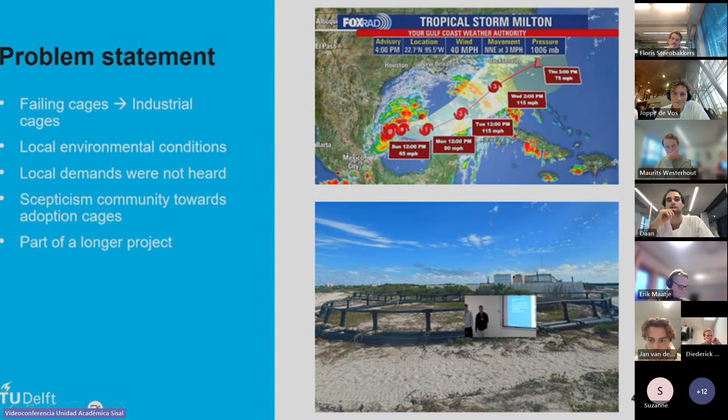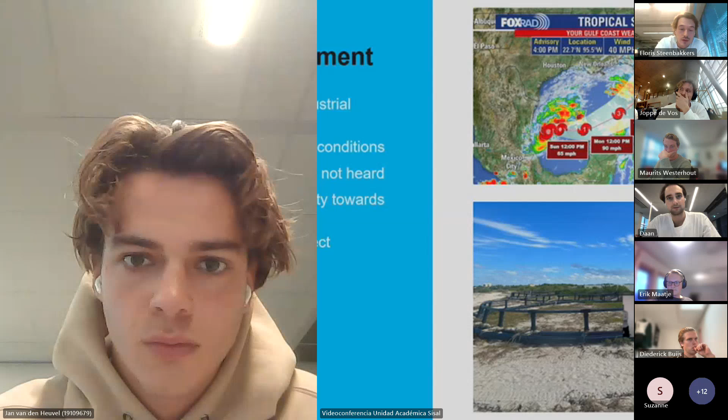So we have the problem, and now it's like, okay, how are you going to tackle this problem? I would like to refer to a quote from my dear friend Steve Jobs, who said Picasso had a saying: 'Good artists copy, great artists steal.'

What I'm trying to say is that we came here thinking we need cages, but we didn't know anything about cages. Were there not examples of cages in the area? So we ended up in Celestun, a fishing port nearby.

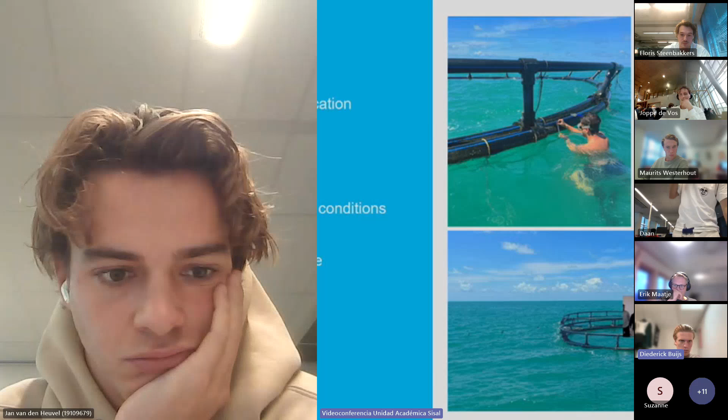We chose this location because it has a similar geographical location on the same continental shelf. It has already proven to be economically viable for a small fishing community.

However, the environmental conditions are different—the depths, currents, and waves differ, which will be elaborated on further. Their cage is found to be too far offshore for the fishermen, which increases fuel costs and so on, but because of the fishing refuge area, they could not put it any closer to shore.

Also, it has shown occasional failures. The Celestun setup is 3 cages, but in the bottom right, when we visited, it's only 2 cages—one of the cages failed and broke due to the environmental conditions.

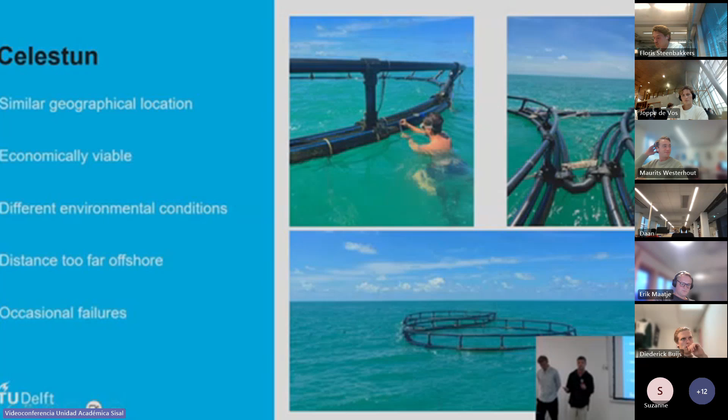So what we did is we took the Celestun cages as a basis, and we did some measurements and took photos of how the construction was actually built. That formed our basis for this project.

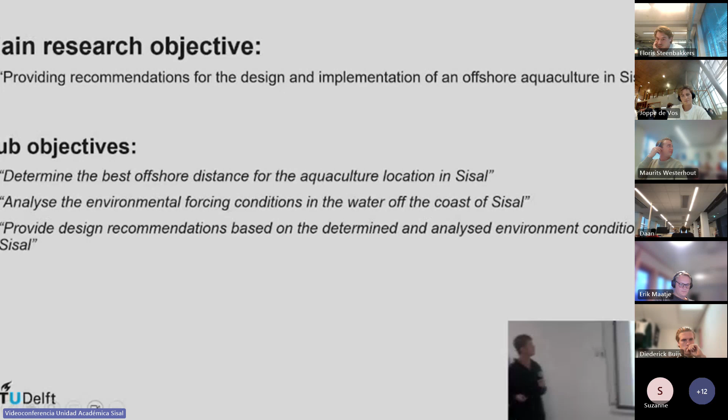Then we defined our main research question based on this. Our main research objective is providing recommendations for the design and implementation of an offshore aquaculture in Sisal, and these recommendations are for long-term success.

We divided them into 3 sub-objectives: determine the best offshore distance for the aquaculture location in Sisal; analyze the environmental forcing conditions in the waters off the coast of Sisal; and provide design recommendations based on the determined and analyzed environmental conditions of Sisal.

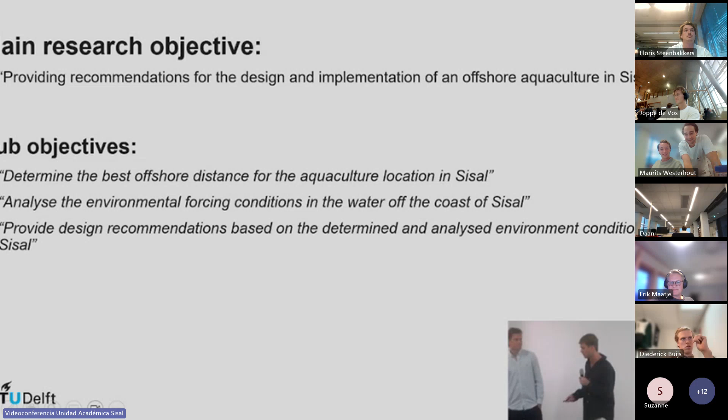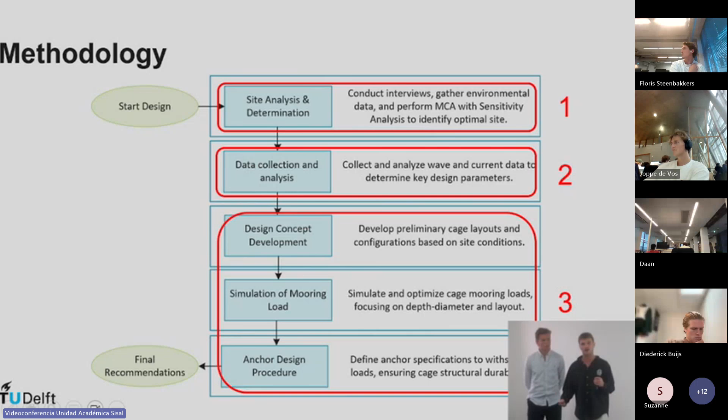Our methodology, as I said, divided our project into 3 parts. The first part consists of a site analysis and determination—Jetse will talk about that. Then we've done data collection and analysis—Chris will talk to you about that. And then part 3, Tom and Martijn will talk about the design concept and procedure, some simulations, and eventually an anchor design procedure. This all provides recommendations for the aquaculture design to ensure long-term success. I'll give the word to Jetse now.

Thank you, Sebas, for that wonderful introduction. As Sebas explained, we first had to determine where we want to place the cages. So how we did that was we chose certain distances offshore from Sisal, ranging from 2 to 20 kilometers offshore.

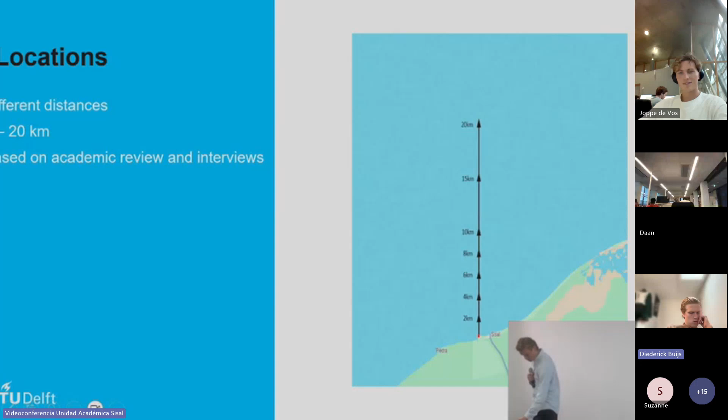This range was based on academic reviews and talks with experts. To see what influences those locations and what factors are important, we conducted some interviews. These interviews helped us gauge interest, set context, and see the perceptions of the parties involved, so we interviewed fishermen, as you can see here.

We interviewed a fisherman from Celestun. Also, at the beginning of our project, we visited a meeting between the fishermen in Celestun and the fishermen in Sisal, about exchanging knowledge of the fishing cages in Celestun. Also, I think you all know him—we interviewed and talked a lot to our dear friend Carlos over there.

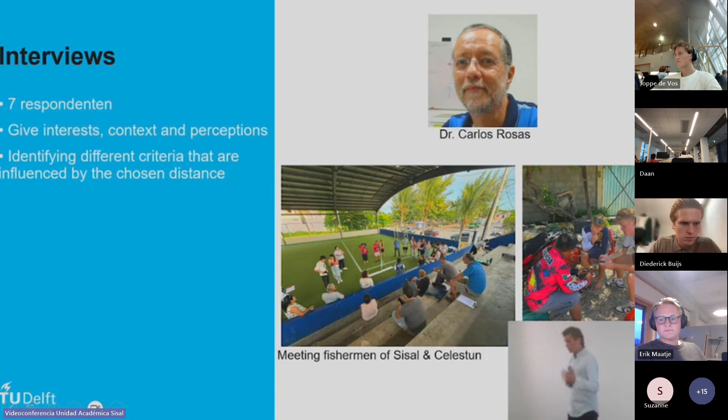And again, the main reason was to identify the different criteria that are influenced by those distances. And what came out of these interviews was that the criteria, actually, you can divide them in three main subjects, which are the local criteria, the environmental criteria, and the structural criteria. And our job was to find a meeting point. We call it the solution space of all those criteria.

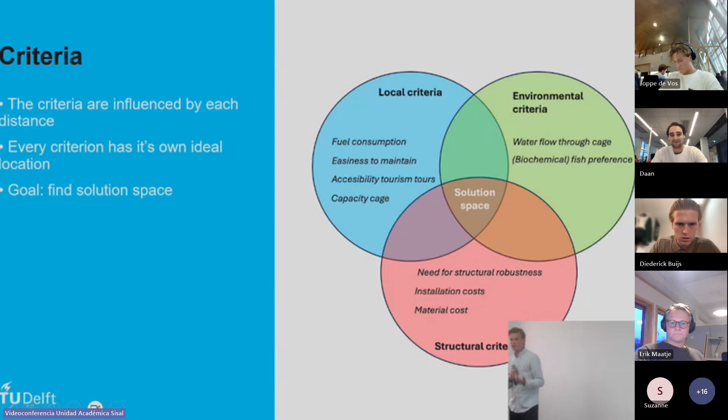So we want to see an optimum of all those criteria, because every criterion has a different favor to a distance. For example, fuel consumption wants to be at a distance closer to shore, because then there's less fuel costs. And what we did was we gave every criterion a score from 1 to 5. 5 means that it performs really well on that distance, and 1 means that it performs really bad. So you can see here on the right-hand side, light blue represents fuel consumption, and at 2 kilometers it gets quite a good score, namely 5, which means that it is very good at that distance.

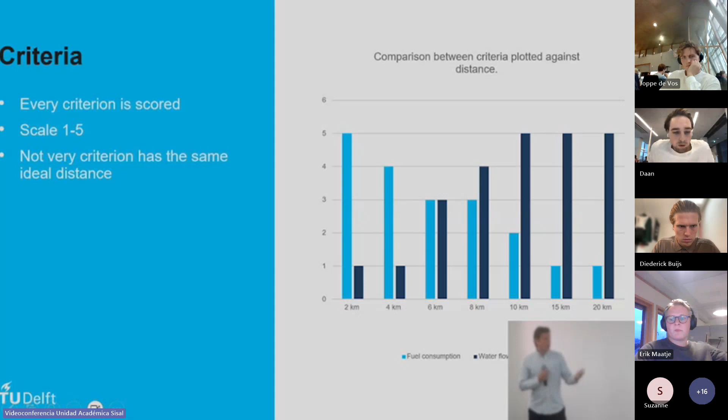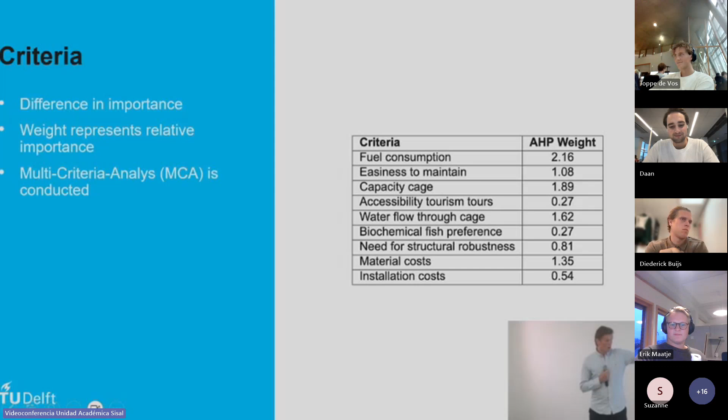At the same time, we show water flow through cage, and you can see that at 2 kilometer distance, this criterion performs really bad and scores therefore a 1. And as the distance increases, the score also increases. So what conclusion we have to draw from this figure is that not all criteria are considered good at the same distance. And another thing we drew from the interviews was that the parties involved, so the fishermen, but also the experts, didn't weight the criteria all the same. So, for example, fishermen really favor fuel consumption above accessibility of the tourism tours.

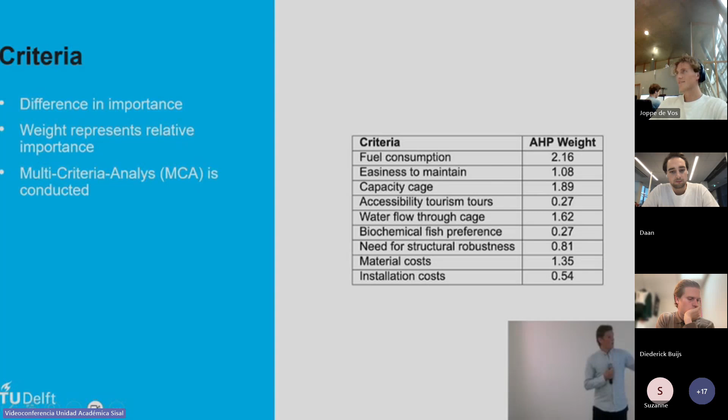So we give every criterion a weight, and this weight represents the importance of that criterion. So, for example, fuel consumption contributes 8 times more in the long-term success of the fishing cages in Sisal than accessibility of the tourism tours. With this information, so with the weights and with the different scores we gave to each criterion, we conducted a multi-criteria analysis, as you can see here. So the scores were added up for each distance, resulting in this figure. And as you can see, 8 kilometers gives the highest score, which is 37. So we can conclude that this distance is the most ideal for the long-term success of the fishing cages in Sisal.

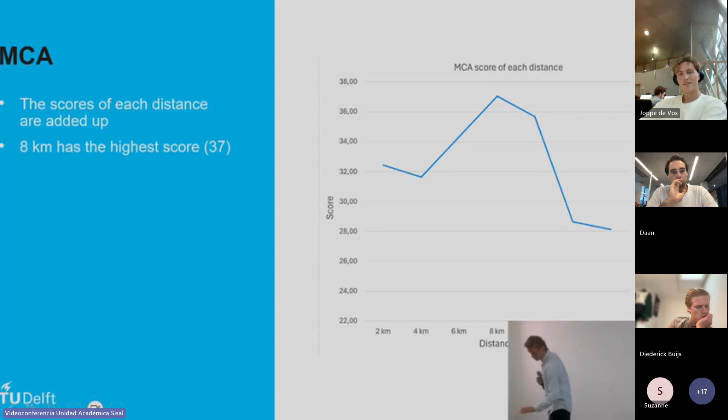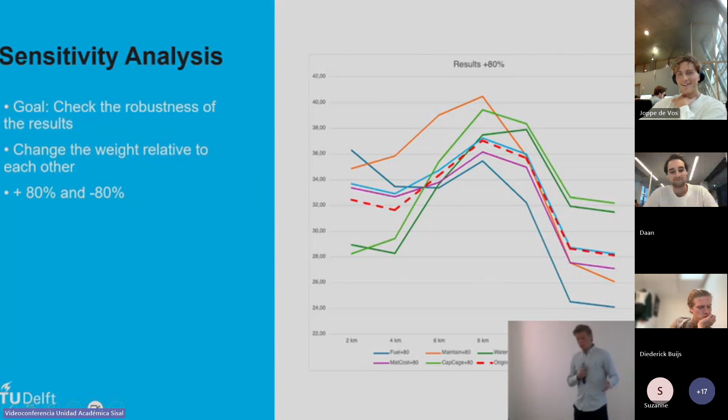However, there is one big problem with MCA analysis, and that is that a lot of assumptions are being made during the process, and there are also a lot of uncertainties. So a way to tackle this is to perform a sensitivity analysis. And with the sensitivity analysis, the goal is to check the robustness of the MCA results. So what you do is you change the weights, and in our case it was 80%. So one criterion becomes 80% more important than the others. And we did it also with -80%, and these are the results. On the left-hand side, you can see results with 80% more importance. The red dotted line is the baseline, so that's the line that came out of our analysis, the predicted analysis.

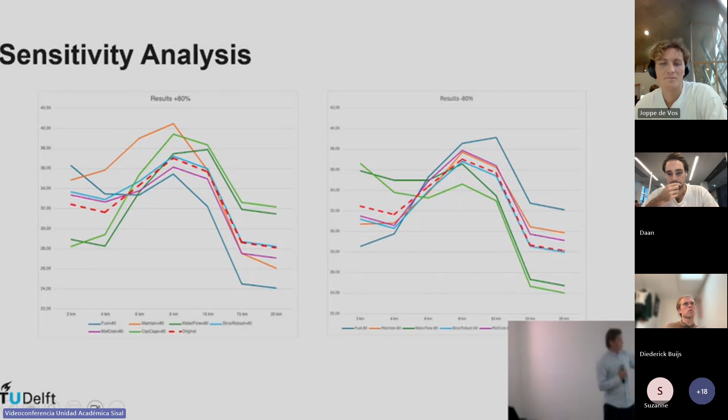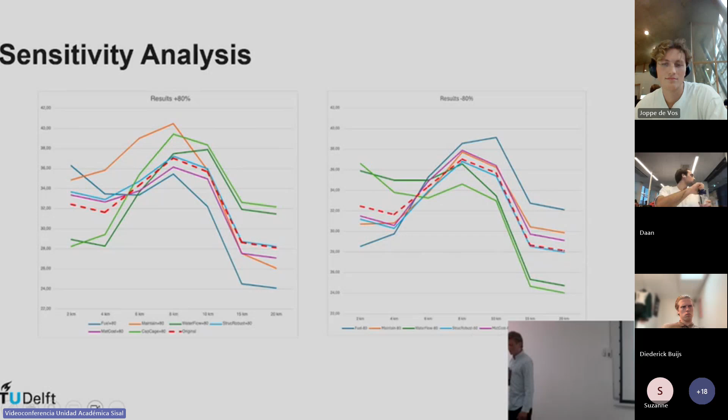And when we look at fuel consumption, which is the blue graph, if it's reduced by 80%, then the whole graph shifts to the right, which is again logical because when fuel consumption gets less importance, then the rest of the scores perform better and the distance is moved further away. Now, what we can learn from these two figures is that in most of the situations, except for fuel consumption and one other, 8 kilometers is always the peak of each graph in both graphs. So we can conclude that indeed 8 kilometers is a robust and good distance for the long-term success of the fishing cages. Okay, now we know the distance, so 8 kilometers.

I would like to give the word to Chris for talking about the environmental conditions. Thank you. Thank you, Jetse. So now we'll go on to the environmental conditions. So what this means is: what forces is our design subjected to? And to make our focus not so broad, we are only focusing on storms. So what are the storm conditions for our design?

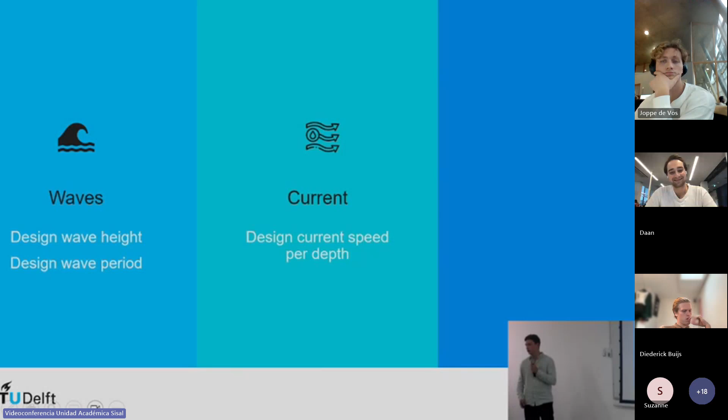So we know our location, and we know we want to focus on storms. So what we're gonna look into is what are the wave height and the wave period for these extreme conditions? What is the current over depth for these extreme conditions? But also very important, where do they both come from?

Before we get into the conditions, let's look at the data. So the data we used is firstly local data through ADCP, about 12 kilometers offshore. And we used the waves and the currents. What we also used, because it had a broader range, so I think 40 years, we used ERA5 reanalysis data for the waves, which is about 40 kilometers offshore for the location.

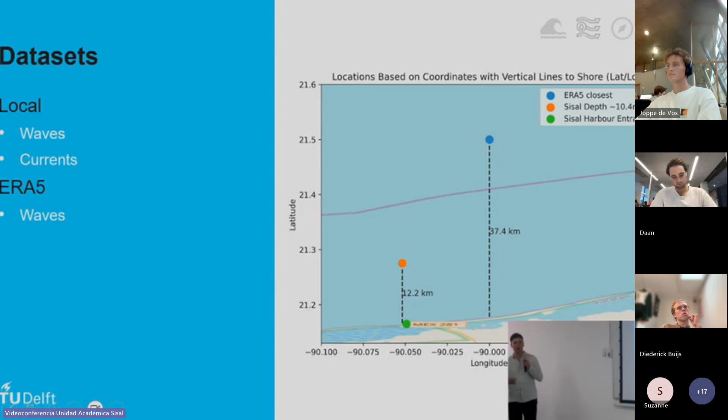Now looking at the waves, we used the ERA5 data because it had a broader range. So 40 years, and what we did is we set a threshold and looked at every storm that was independent above this threshold. So what storms had a wave height more than 2.7, and were these waves 4 days apart to make certain that they were independent. With this, we fitted them to a generalized Pareto distribution. This is used to fit the end of tails, so extreme values. And with this, we could calculate the return period.

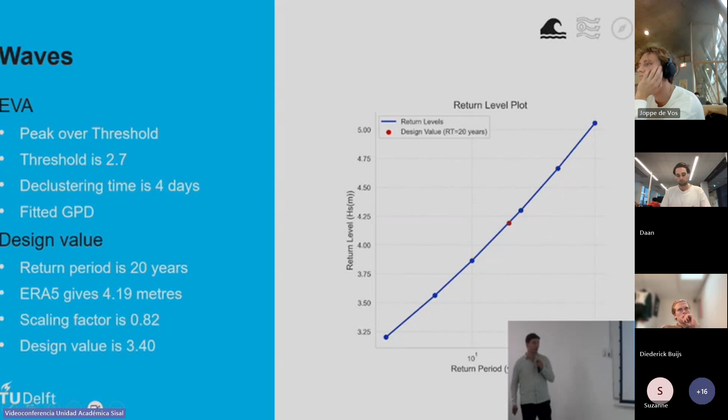We needed a return period because we had a design life of 20 years, and we wanted to know what wave height our cage is going to be subjected to in these 20 years. So using the return period of 20 years, we came to a wave height of 4.19 meters. But because we used the ERA5 data, it was 40 kilometers away and was not as close to the shore as our cage will be. So by using the local data and calculating a scaling factor, we could actually calculate it for closer to the shore and came to a design value of 3.4 meters.

With this 3.4 meters, we calculated the wave period. So we used the ERA5 data again, because it had a strong correlation between wave period and wave height. And with a power law regression, we could calculate for every wave height, and for our wave height of 3.4 meters, the wave period. And because we wanted to have these extreme forces on our design, on our cage, we wanted to look at the top level. So what is the confidence interval for 95%? What is the most significant wave period? And we came to 9.34 seconds.

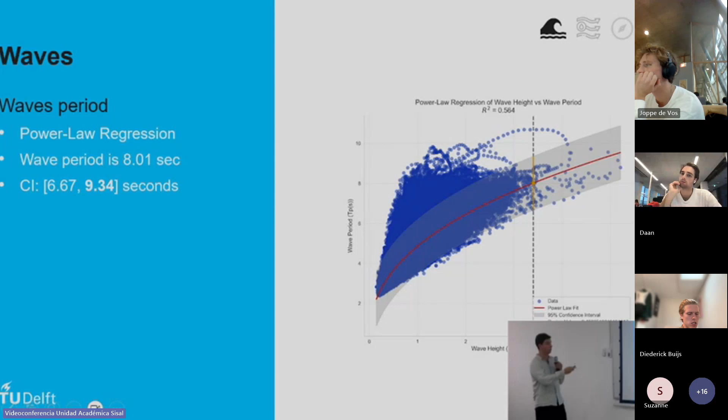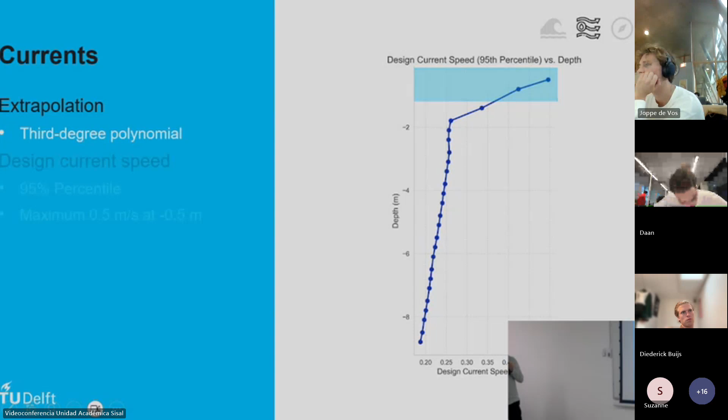Then we'll continue with currents. We had the current data from about 1 meter below the surface to about 8, but we wanted to have more data on top. So what current forces is our cage subjected to? So we extrapolated the data we had below to calculate the data on top with a third-degree polynomial. With all this data, we used the 95th percentile to calculate the design value.

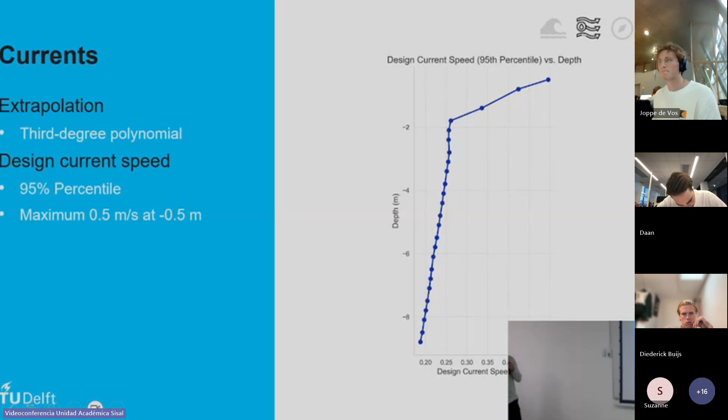This is because, unlike the waves where we had 40 years so we could do an extreme value analysis, we had 10 years. So extreme value analysis wasn't going to have the same results. So with the 95th percentile, you have a value that is higher than 95% of all the values, but leaving out the 5% that may be due to errors and uncertainty. So it's actually quite a safe value without being too conservative for the structure, because you'll get values that are way higher and are actually not going to be here. And what we figured is that the maximum was 0.5 meters per second at 0.5 meters below the surface.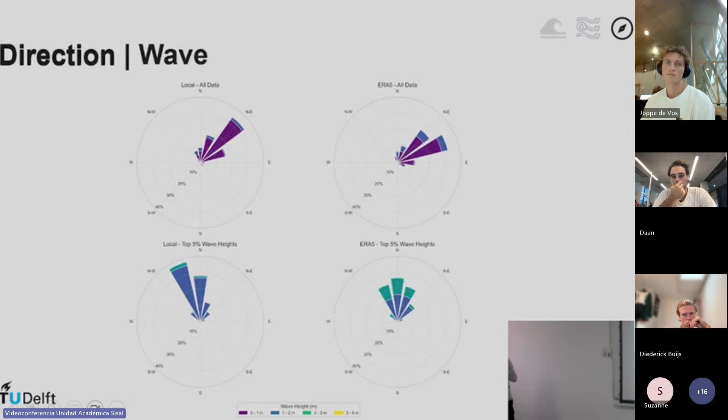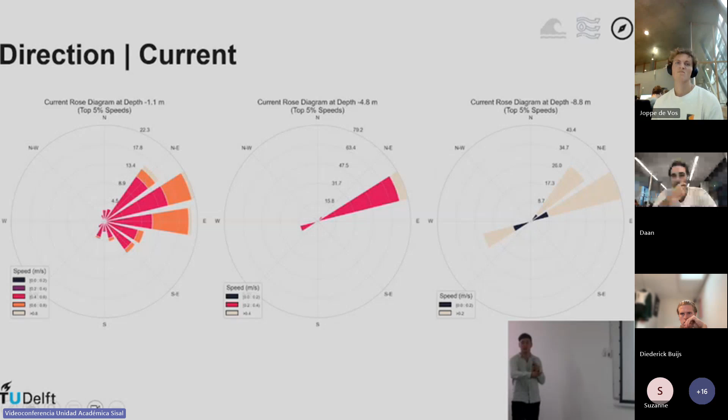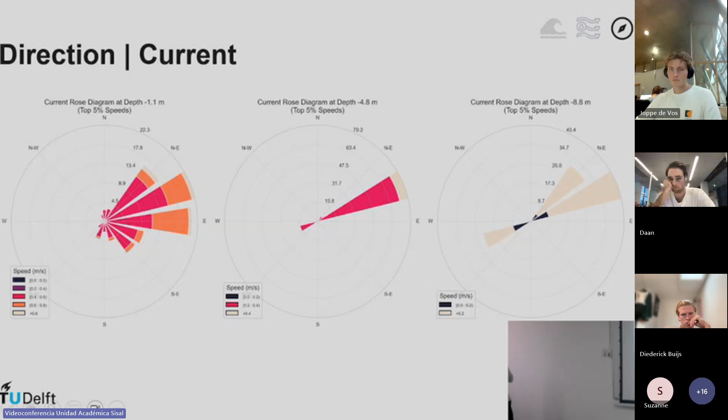There is a difference. And with the current, if you look at the top, there's a lot of variability. And this is because it's close to the surface, it is more prone to error, and you have winds. So there are a lot of reasons that this is unreliable. So what we used is more depth for the direction. And with this, and again by using the top 5%, we could look up: okay, if we take the top 5% of both the current and the waves, so all the times that they're all on top, so this means all our storms that we're looking into, what is the general direction?

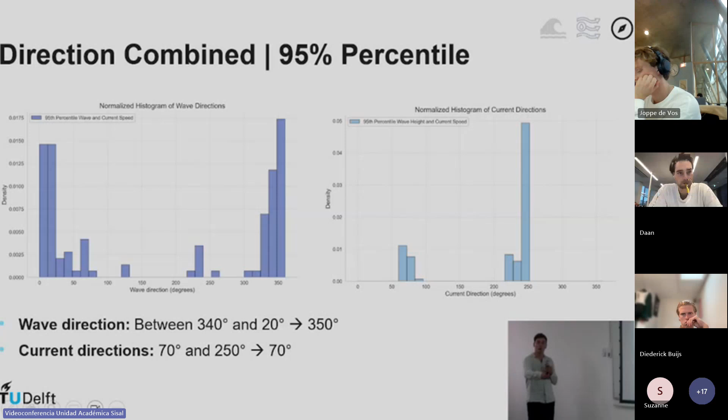And you see that for the waves, it's actually always from the same direction, just slightly, but with current there are two directions. You have the 250 degrees, and, but again, because of the minimal degrees between our two forces, it would actually have the highest force on our structure. So we decided to use the 70.

To conclude, for the wave,

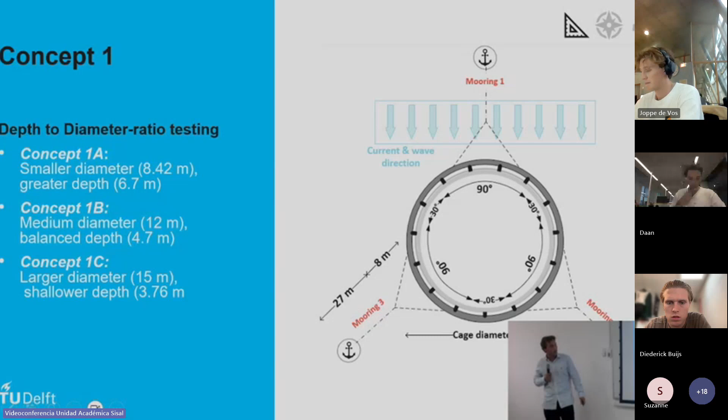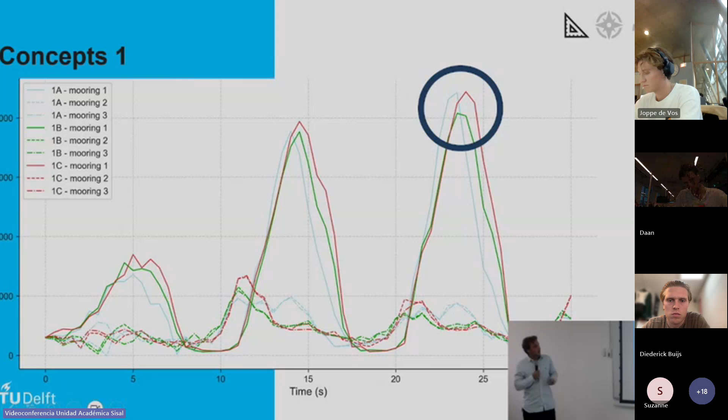Well, what are the results then? The results looked like this. So over here, you can see all the mooring line tensions, the 9 mooring lines, because there are 3 sub-concepts, of course. And over here, after going to a more steady state, we found out that the 1B, the actual diameter depth ratio of Celestine, actually reduces the drag and has the least mooring line tensions in it. So yeah, that's interesting. So now we know what diameter depth ratio we're going to look at.

And we made another concept, the concept 2. This is a more simplified structure that reduces material costs and installation complexity because it has 4 mooring lines, anchor systems. And this distributes the forces into, well, looking at 3 mooring lines, of course. So this is the second concept we found. And there's a connection piece between them, just like the ones in Celestine.

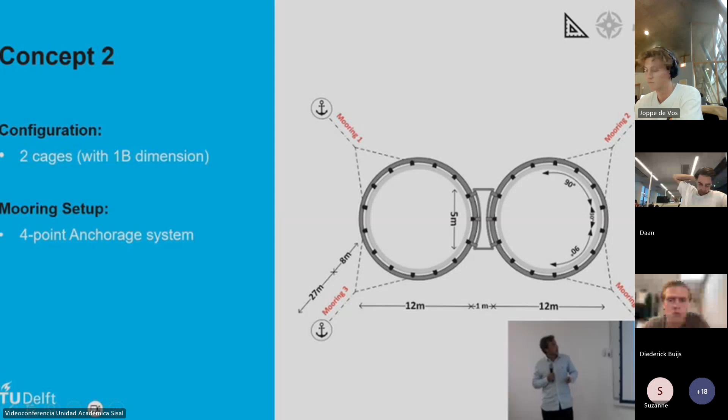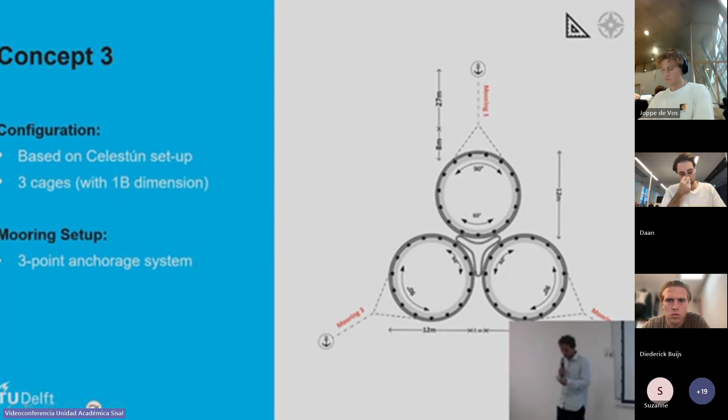Yes, thank you, Martin. So now we know which 3 concepts we want to use. We decided it's interesting to look into in which orientations these concepts experience the lowest maximum mooring line tensions in the most frequent environmental conditions for Sisal. So we simulated the mooring lines pointing at 6 different directions for each concept, subjected to the most frequent environmental conditions of Sisal, where you can see the current coming from here and the wave heading from on top.

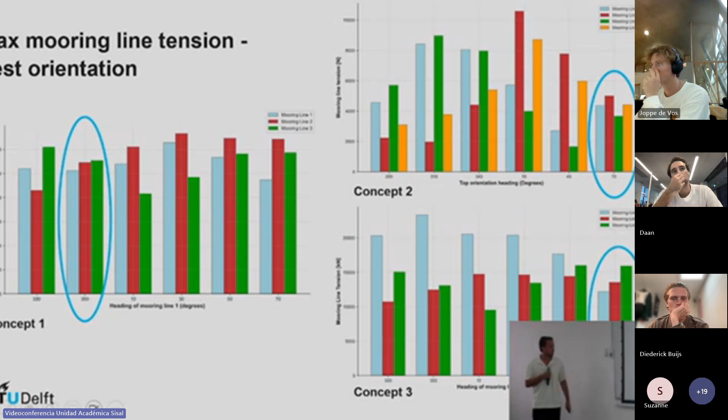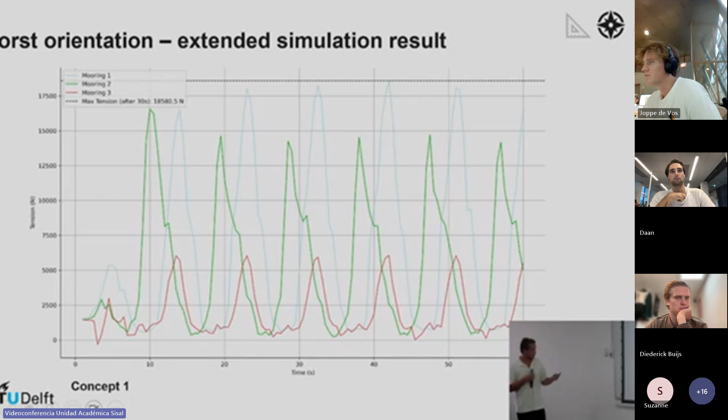What we found was maximum mooring line tensions for each heading. They can be seen in these bar plots where the lowest maximum tensions can be found in these orientations, where the forces are distributed the best in between each mooring line. Also found the worst orientation where the maximum mooring line forces were the highest. We used this orientation to look further into and did a more extensive simulation for a longer period and a smaller simulation period, and look into the steady state. After the steady state response has been reached, what are the maximum tensions? These tensions we used for our anchor design.

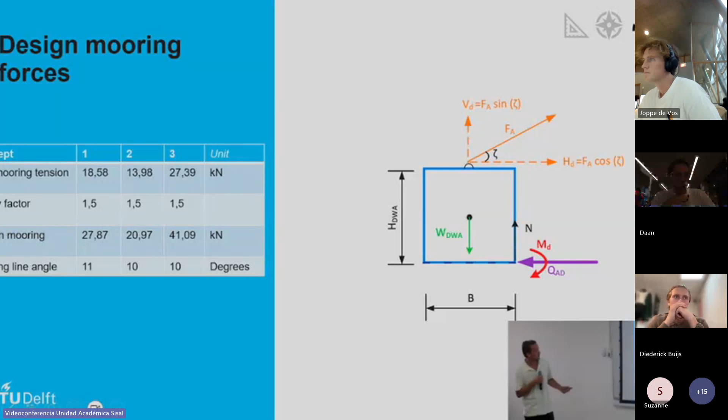So we see the max mooring tensions, and after we knew them, we applied a safety factor, and we came up to design mooring force for each concept in combination with the mooring line angle. On the right, we can see a simplified picture of our deadweight anchor with the mooring line force coming from here and the angle pointing in the right direction. And that way we could make a rectangular concrete anchor sitting on top of sandy soil and apply the ultimate limit state tests by first doing a preliminary design for the first dimensions.

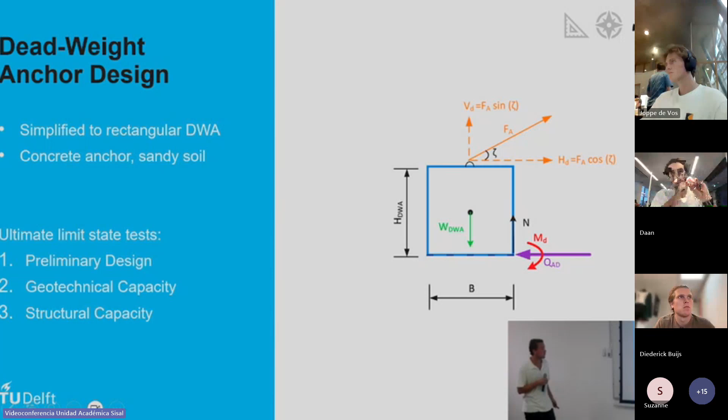Then we did a geotechnical capacity check, to make sure it could withstand the interaction with the soil, so prevent sliding and being lifted up. And we also did a structural capacity test to make sure the concrete is strong enough to withstand the mooring line forces. So we found the following results: maximum anchor weights of 5.9, 4.5, and 8.8 tons, and the dimensions underneath.

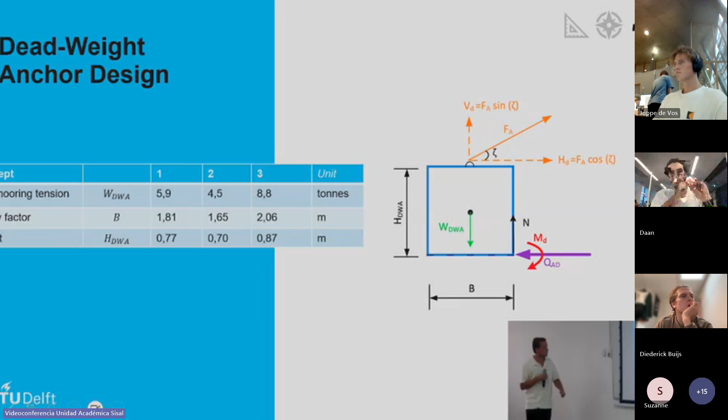And all in all, this made the total recommendations of our research into these different fields of placing aquaculture in Sisal at 8 kilometers offshore at a 9.5 meter depth. They have to be resistant against a design wave height of 3.4 meters, a wave period of 9.3 seconds, and resistant against a step current profile with a mean of 0.25 meters per second. We found an optimal diameter to depth ratio of 12 to 4.7 meters and orientations of 350, 70, and 50 degrees.

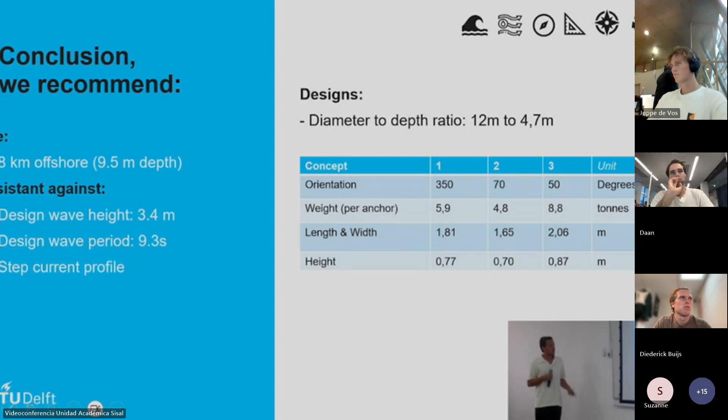Of course, this was just a preliminary design, so there are a lot of things we think are very interesting to look into for the future. To start with, safety, so to prevent the cages from being emptied unintentionally or vandalism by local fishers or other people. Further research into that is very, very helpful.

Also, the costs, to know exactly what are the investments of aquaculture and who's going to pay for it, need more investigation as well. Then to determine more precise environmental conditions, additional measurements will be very helpful at different locations to decide to which forces the cages will be subjected.

For the design, we only did a strength analysis right now, and for long-term feasibility of the project, a fatigue analysis has to be done as well to make sure the system is resistant to fatigue loading. And also we have only looked into mooring line tensions, and all the other components of the cages were assumed strong enough, but of course it has to be researched as well.

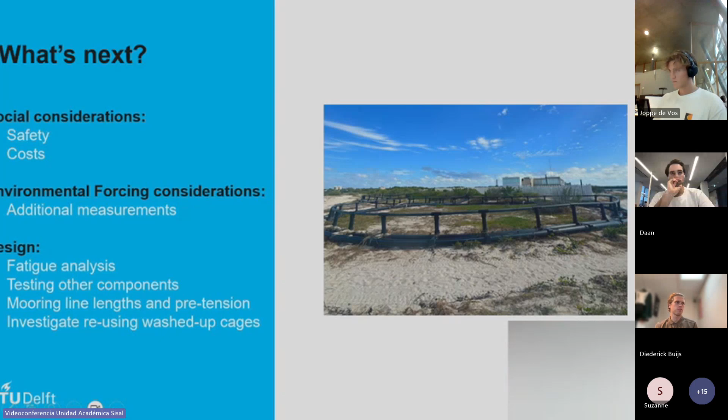And we think there can be a lot of improvements when looking into different mooring line lengths and pretensions, because we assumed one length with one certain pretension now, and maybe the mooring forces can be reduced a lot by doing more research into that. And to end with, investigating reusing the washed up cages in front of the UNAM site can be a very interesting opportunity to realize economically feasible and long-term successful aquaculture here in Sisal.

So what we did, because there isn't just one design that'll work, because it all depends on what capacity you want to have. So what we try to do is design for modularity. So if you want the volume of 1, then we have the recommendations for just 1 ring. Do you want to change it to 2 or start with 2? Then we have the recommendations for 2, and the same is for 3. So by designing for modularity, we're trying to design for something that we don't know, which is what is the capacity that people want.

Okay. So do you think it will be interesting or maybe possible to make some models and test it in the wave channel, or is it worthless, just to see maybe the tensions and how these forces are? I think it could work, but I don't know how difficult it is to make the models exactly like, or make the drag exactly like it would be. And then looking at tension, for sure you can use it. If the drag seems very similar, then for sure you can use it. And it would be interesting, I think, because you can test it.

Also most important, we saw that the wave has the most influence. So I think it should be okay. But I mean, over there, you don't really have a current from the other side. So it should be possible though. Most of the forces acting on the mooring lines are actually waves.

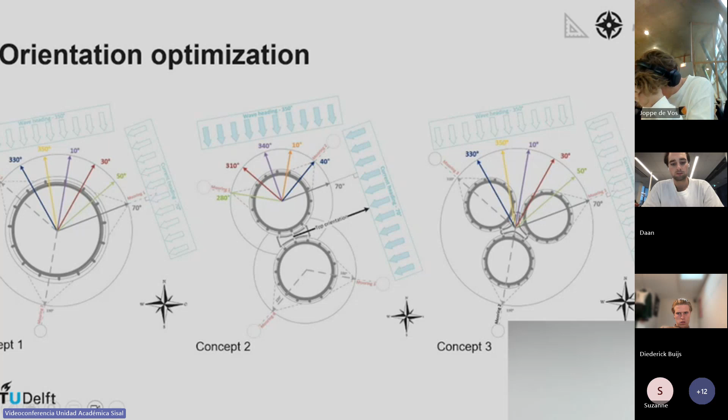And the Celestun cages are actually working well? Yeah, right now for the hurricane season, they are taking out the nets. So they're not using them, I think from July to December. But in December they will put the nets back and the fish, and they are in operation. Okay. And one last one, very quick. This wave design of 9 seconds period and 3.4 meters, is that acceptable for the fish inside? Or we don't know?

I'd say yes, but then I'd be guessing. I think so, if it works in Celestun, but we don't know for sure. Actually my focus was not on the fish, but on the cages and the nets. They are also taken out during hurricane season, so there's no real fishing activity.

I think we found some sources, also in our report, that waves are not the big problem. I think current is, because if there's a lot of current, the fish have to use a lot of energy to stay in their place. So it's more about the current, and the maximum current, according to literature, is still okay for the fishes.

Thank you very much. Thank you very much for this information, it's very useful for us, for the project, and for the people. And I can understand very well how you found the values of the waves and currents and many things that you showed, but certainly you know, and they are true, I suppose.

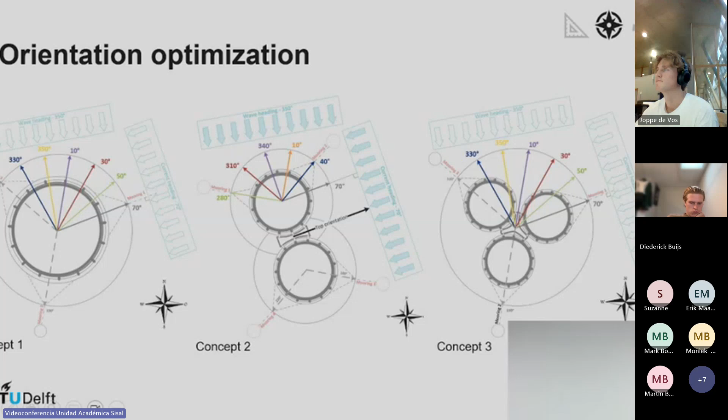But I think more about the social aspect, it's first to overcome the skepticism of the community, because you are growing the pompano fish in the lab, right? So my recommendation is to first show it on a smaller scale, so you don't need heavy anchors, you don't need a big cage. On a small scale, show that it works, that you get a good yield from fishing in a very small cage. If you get the community on your side and show that it works, then you can start thinking about how to expand.

And then you need the dimensions and all the conditions of a cage to expand, and you would know them if research has been done. So testing is expensive, of course, but we've done a data analysis on the heaviest conditions, so it should be well beyond what's actually going to happen in Sisal. We have two years to do the experiments, I hope. No, thank you.

Do you have any idea how much these farms can actually produce compared to regular fishing that is happening now? Maybe it's not part of your research, but can you compare to Celestun? We don't know the exact numbers because we don't have the local fishing price per kilo, so there's a lot of variables.